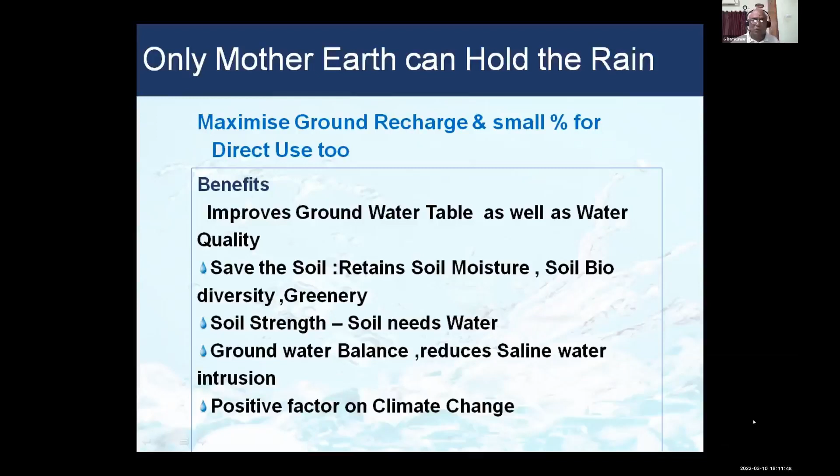This year's theme, groundwater, making the invisible visible. It's a very beautiful word. Can we achieve it? We can, by joining hands, and nature gives more rain than we need, and also by taking the water into the ground. Maximize groundwater recharge. Only a small percentage can be used for direct use. It improves the groundwater table. Many people are not aware that it improves groundwater quality also, because rainwater is the purest form of water. In addition, rainwater floats on saline water. That is God's gift. It improves soil strength. In case we do not do harvesting, the soil becomes brittle, weaker. Most important, it contributes to addressing climate change. The various steps of rainwater harvesting are there. Team involvement, finally, a water positive model.

Our country receives about 1 meter of rainfall and only 8% of this rainfall is being utilized. Hence, the huge potential. I have taken this from the National Water Mission talks. By rainwater harvesting or recharging the ground, we can be water comfortable, if not water rich. An example of Chennai is always relevant, because Chennai comes with the tag of a water-starved city. But nature has given more water, 1.4 meters per year against the average of 1 meter. And we need only 1/3 of this water for Chennaites to live like kings on water. I'm going to the implementations.

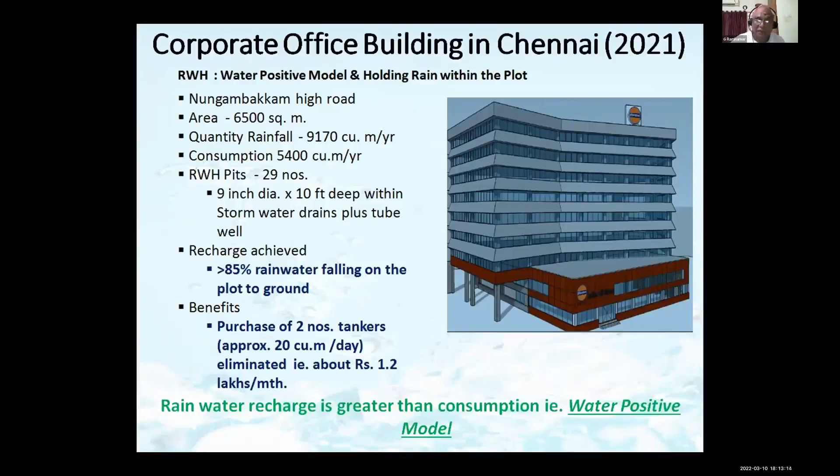Mr. Shankar Ramurthy also will join me towards the end in communicating the advantages. This is the lovely Indian Oil Bhavan building in the prime area of Nungambakkam High Road. This entire area was inundated with water in the last rains. How have we managed not to have waterlogging here, made the building a water positive model, and also achieved groundwater recharge by retaining more than 85% into the ground? How have we done it? I'm going quite fast. This is the building. We have used the existing stormwater drain. That means no money is wasted in catching the water. That is the fundamental principle in catching the water: no money is wasted.

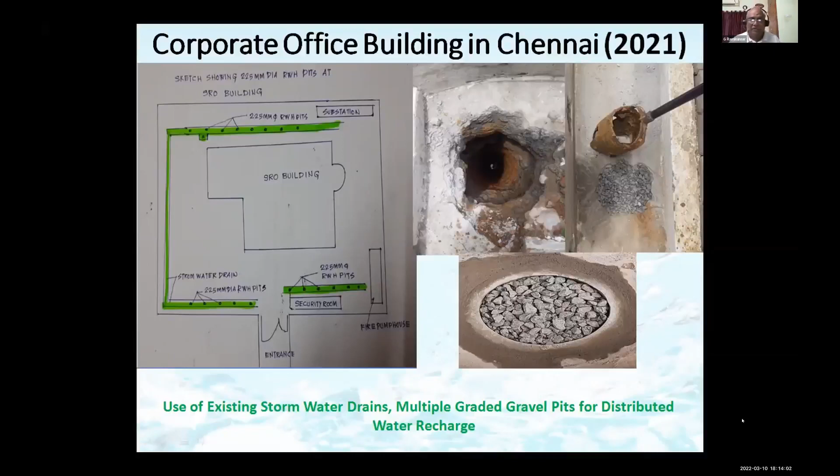We have put about 29 pits here. And how are the pits made? Well within the drain, no extra space taken. These are the pits. You can see the earth, and the gravel is poured into the earth. That means there is percolation from the gravel or blue metal directly to the earth. There is no concrete structure in these wells. It enables both radial and longitudinal percolation. This is the finished surface, where we can see it very aesthetically merging with the stormwater drain. And this is a tube well.

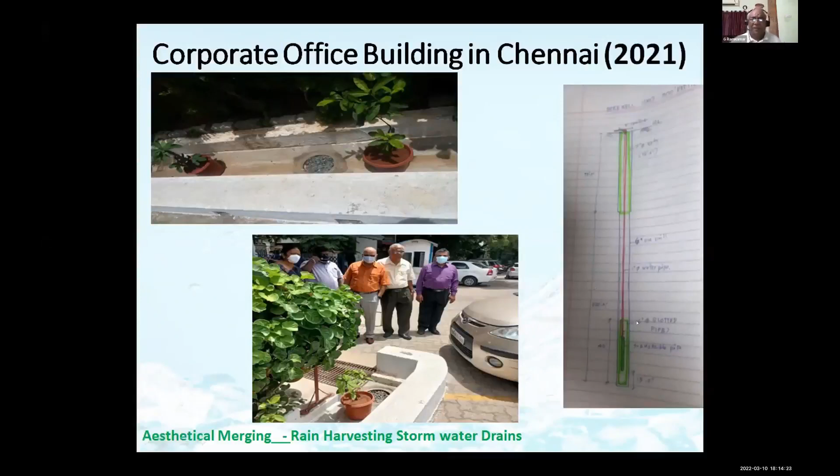In fact, Indian Oil could stop buying tankers, saving about 2 tankers a day. The amount spent on rainwater harvesting was less than 4 lakhs. It was paid back in less than 3 months. What is the result? Our building area is quite clean and the outside fully waterlogged. Can I request Shankar Ramurthy to share his thoughts quickly?

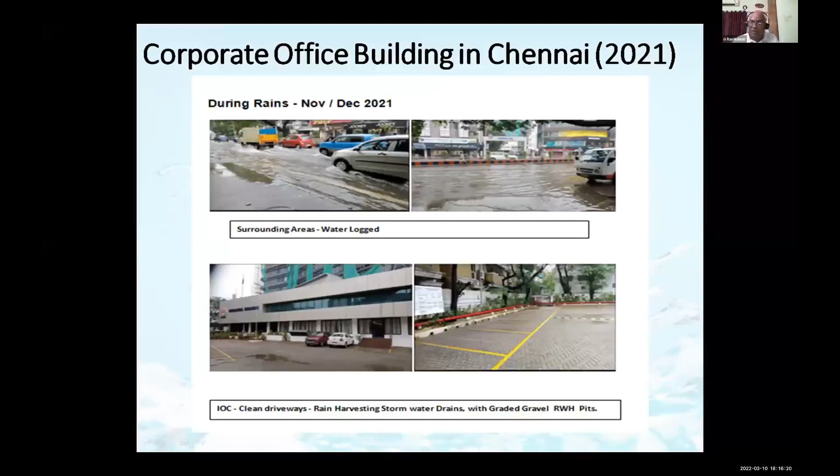My theme is, why not we replicate this concept? Because everywhere in Chennai, it is the roads which become the drains during rains. Why not we replicate this as the concept of rain harvesting stormwater drains with distributed graded gravel pits within the stormwater drain? This can be a great success because Chennai is a flat terrain. A lot of hydraulic head is required even if you want to take the water to the Bay of Bengal. This method will ensure uniformly distributed discharge into the soil, strengthening the soil, improving the water table, keeping the drains clean, keeping the roads clean. This could be a sponge city model.

My plea to this august forum, there are very eminent people in this forum. Why not we take it up to the government? I understand the Chief Minister has constituted a committee. He was highly worried that there has been a lot of waterlogging. We can present this to the committee as the simplest method, because there is no necessity to spend crores of rupees. We can harvest the water into the ground and save the city from flooding as well as use the bountiful rains.

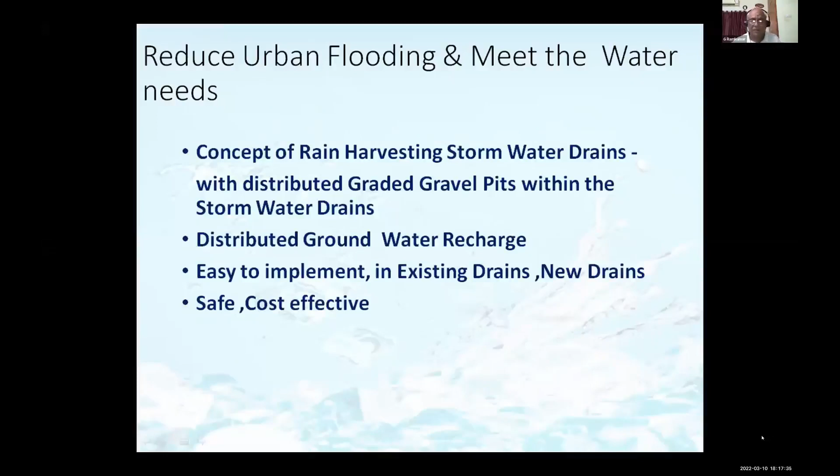See, this is a concept I tried in Andheri, our own complex, in 2011 with great success, at a cost of 1.3 lakhs. And Indian Oil had given me a trophy with a citation on the Indian Oil Day 2012. This rain harvesting stormwater drain, a very cost-effective method, was tried out in 2011, with a trophy from Indian Oil on the Indian Oil Day. A proof of the success of these models.

Very low cost, very safe. It cost me only 1.3 lakhs. The consultant wanted 1.5 lakhs to give a scheme. What I suggested cost only 1.3 lakhs. Indian Oil has been kind enough to give us a trophy on the Indian Oil Day 2012. The trophy is in my drawing room, acting as a motivation to pursue this goal.

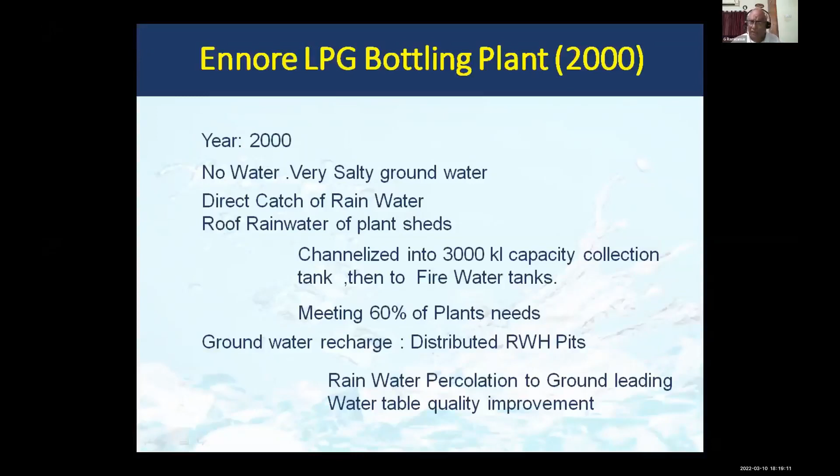Of the 50 acres of land we had, we located the roof of the largest area. That's the plant shed, 7,300 square meters. We could collect 10 million liters of water every year through the pipes. 10 million liters of water. This tank was 3 million. From here, our LPG plant already had storage tanks because we require a lot of water for fire protection. This was 12 million. So this is only a buffer tank.

It gets filled up. And this water, rainwater being the purest form of water, was originally used even for drinking purposes. Now they have got a better connection. It is meeting 60% of the plant's water requirement even today. The cost was 45 lakhs and the payback period was less than 4 years. And for more than 22 years, it is giving excellent service.

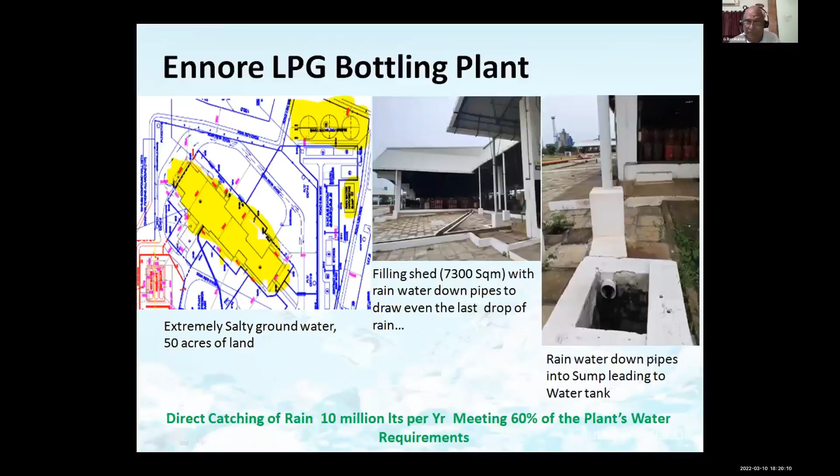Next important parameter. There is no point unless we improve the groundwater. So we recharged with 54 recharging pits, all connected to the stormwater drain. In fact, my learning of putting the pits within the stormwater drain came after that. Here, we have improved the saline water to service quality water today.

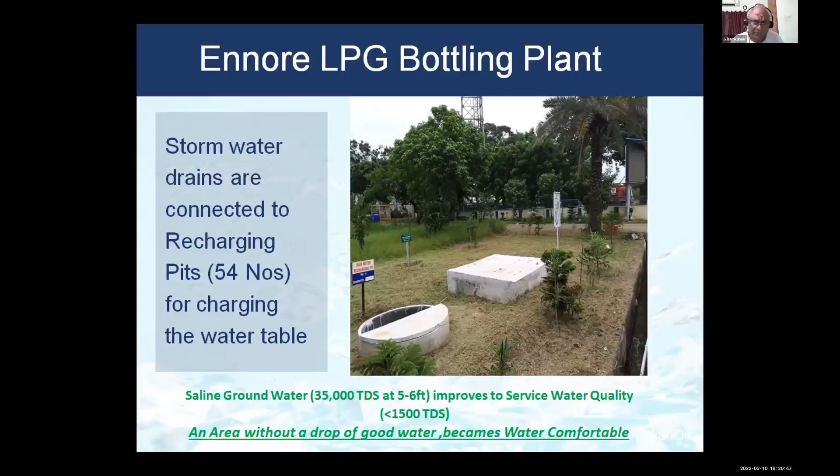This is being used for gardening and it will come to the rescue of the plant at any point of time. A phenomenal achievement where we had not a single drop of water. By very simple methods, we have converted to a water comfortable situation. Not only that, the groundwater is improving day by day.

Let me come to the bad practices in urban areas. You see, it is the city dweller who has least respect for water. The connect of the farmers to the water is excellent. The city dweller throws water onto the road. And Chennai, our main city, is flooding because of such problems.

And let me show you a clip here, which I have taken at the end of November during the rains, opposite Meenambakkam Airport in a prestigious area of Chennai, where a poor scooterist escaped because he could negotiate it. Why don't we take all these waters, wherever they are distributed, and take them into the ground? Because this sort of method not only creates a hazard for people, the roads are becoming the drains.

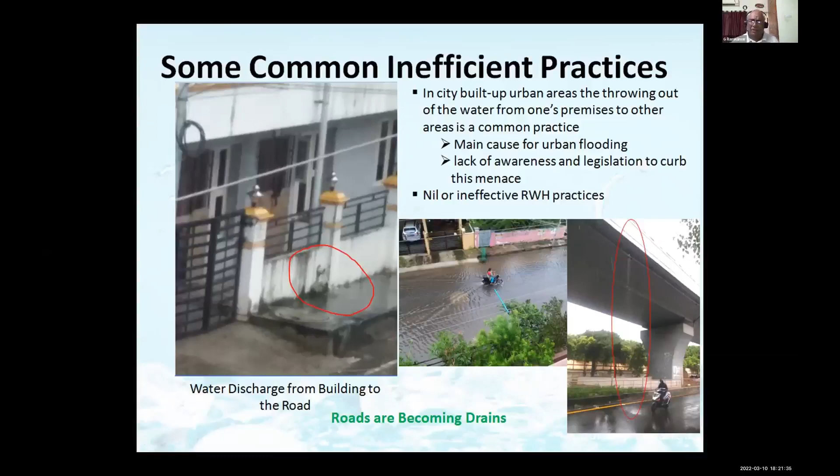This is my own house where I'm staying, about 8 apartments in the Kamakoti Nagar area of Pallikaranai. The water in our house 10 years back was blackish water. A person who drank the water would have to go to hospital immediately. That water, we have changed it, we have improved it by using only rainwater in the last 10 to 12 years. What we have done is taken the terrace water into the well.

The well water, which had a TDS of 35,000 or 40,000, is now less than 500 ppm in the rainy season and less than 1,500 ppm in the summer season. It is meeting 40% of our water needs. In addition, the driveway water goes into the greenery. This is an example where we are able to retain more than 90% of the water in our own area. I'm just showing an illustration of the graded gravel pits.

Because there is no hollow space. In petroleum installations, we do not like hollow space. A small trough for the water to fall, and water gets percolated both radially and longitudinally. A much superior proposition to the conventional structural pits, which are costlier and which allow water discharge only longitudinally. Much safer, least costly, more efficient, simple in design, and strengthening the soil, because we are introducing graded gravel pits, which are the best form of soil.

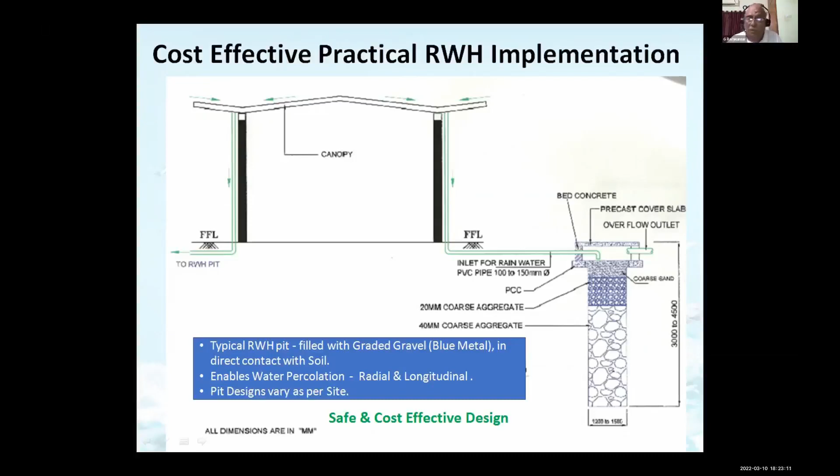Another example, with the roof water, this is the petrol stations we were talking about. This is what I've done in Kamakoti in our park. But I had planned 25 minutes. I have taken only 18 minutes now.

In fact, this is a petrol station. I have taken highway petrol stations, where we are not supposed to throw the water onto the road. What have we done? The driveway water, we have caught it and we are able to harvest it in the front kacha nala. Earlier, it was going partially to the outside fields. We could harvest about 60% of the water with this method. In addition, we can do the canopy harvesting by the figure which I have shown you earlier.

This is a very successful model of community park rainwater harvesting, done to prevent flooding and improve the water table and the water quality in a 1 hectare community park at Kamakoti Nagar, where I stay. The groundwater is saline. This park is like a saucer. In fact, the outside water also enters this park. And it used to be flooded in rains for 3 weeks. Now the flooding is reduced to 3 days.

How did we achieve it? In any rainwater harvesting measures, people join together. The mind of the person is more important. The solutions are simple. So we have the corporation executive engineers standing along with me at the park, along with our association and team L&T. I could open them 2 years back for Water Day under a CSR scheme, with myself deliberating the simplest of designs to recharge the ground in a cost-effective mechanism.

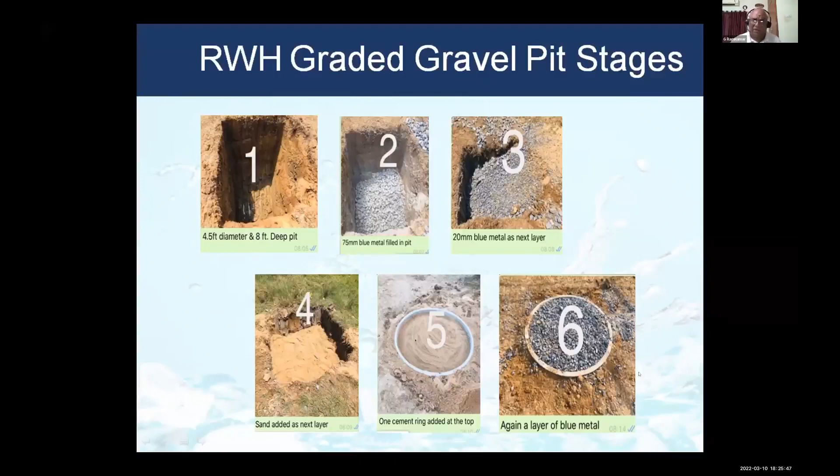What have we done? We can see the 6 stages of the pit. We have dug about 4.5 feet, and finally about 8 feet in depth, and the graded gravel is filled. The pit is filled with graded gravel, which enables radial and longitudinal percolation. You can see the finished pit merging with the topography. I've already explained the advantages. We are able to take 10 million liters of water annually into the ground. In fact, if you improve upon it, we can take even more.

In fact, the wetlands are the life of Chennai, and we are lucky to have the Pallikaranai wetland, the marshland. In case the Pallikaranai wetland is lost, Chennai city will die. I've also been part of my Trivandrum Engineering College group in propagating awareness. We have even conducted painting competitions for children. We had discussions with the forest officials on the maintenance and conservation of this wetland.